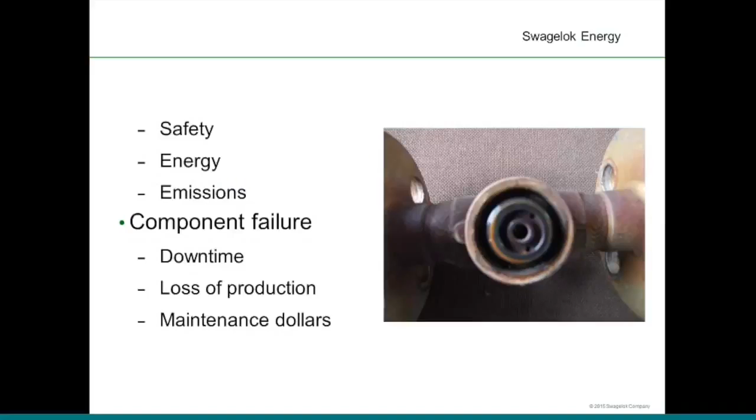The reliability areas I'm going to be talking about are, number one, steam leakage, and two, component failure. Steam leakage affects safety, energy, and emissions. When we talk about leakage, people always think it's just about energy, but it's more of a safety item. The other thing I want to talk about today is component failure, downtime, loss of production, and maintenance dollars.

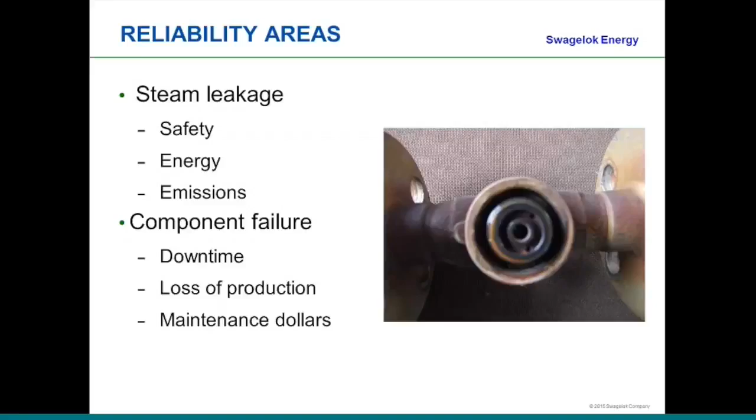Everything that we put into a steam system today must last 6 years. But in order to achieve that 6-year reliability, a number of things must occur. And the biggest thing of any reliability program, the most important thing, is change. Things must change. The way we did it 10 years, 15 years, even 5 years ago is not how we can do it today. We must demand reliability of all components that we put into the steam system. In order to do that, a number of things have to change. So if you're ready to have change, then things will dramatically improve in the steam system.

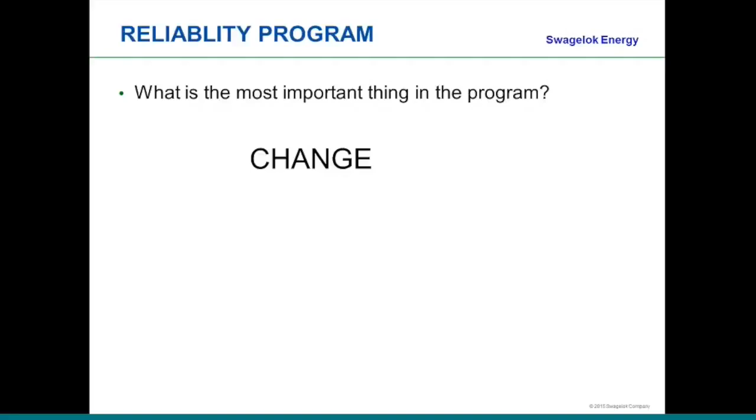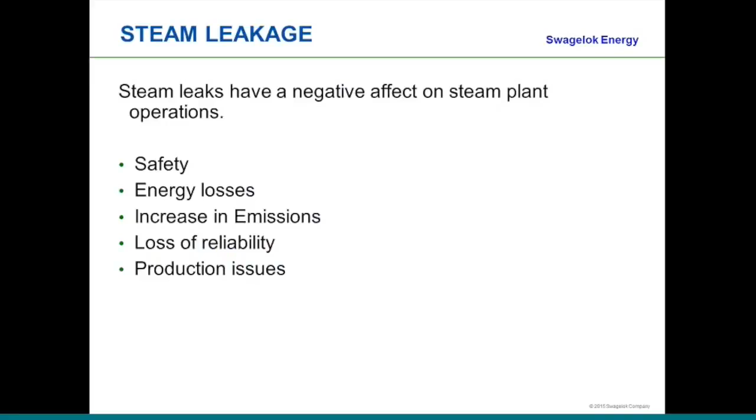One area is steam leakage. Steam leakage has a negative effect on a steam plant operation: safety, energy losses, increased emissions. One of the things people forget about is the emissions. So if I go out and fix a steam leak, how many tons of CO2 will I stop being put up into the air? The other thing is also loss of reliability, and the thing a steam leak does is cause production issues. So those are some of the areas we want to take a look at.

Energy losses can be as high as 19% or even higher in a few cases of the total steam energy production cost. In doing analysis for steam leakage in plants, unfortunately we've seen over and over again as much as 19% of the energy produced is lost through steam leakage. So if I had a $1 million fuel budget, 19% would contribute to $190,000 in energy losses. A tremendous amount of energy to be lost.

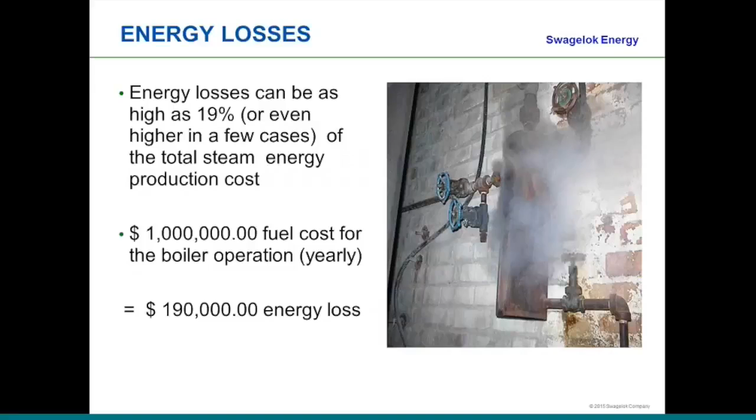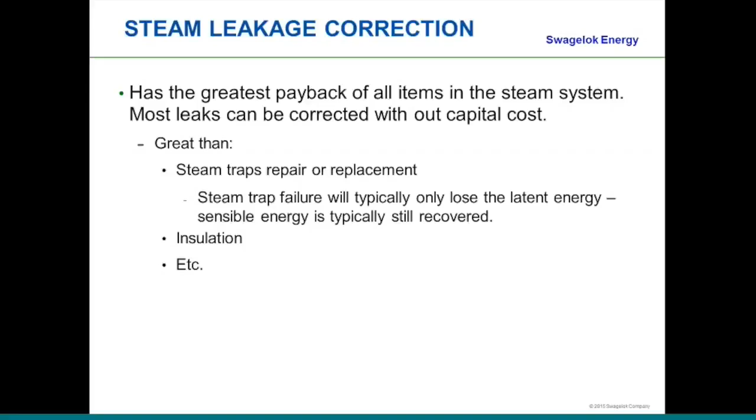The greatest payback of all items in the steam system is steam leakage correction. We talk about doing this or that in the steam system to improve or optimize the steam system thermal cycle efficiency. One of the biggest and greatest paybacks is steam leakage, greater than steam trap repair or replacement. People always say, put money out there to correct the steam trap failures and it'll save you all this money. But steam leakage is far, far higher payback than steam traps, insulation, or et cetera. So if you're looking to optimize the steam system, steam leakage is the number one, or maybe even number two, area that you want to take a look at.

Steam leakage versus compressed air leakage: a steam leak on a yearly basis would cost $3,591 at 100 psig for a 1/8 inch leak, that's based on $10 per 1,000 pounds. Steam leakage represents an immediate savings.

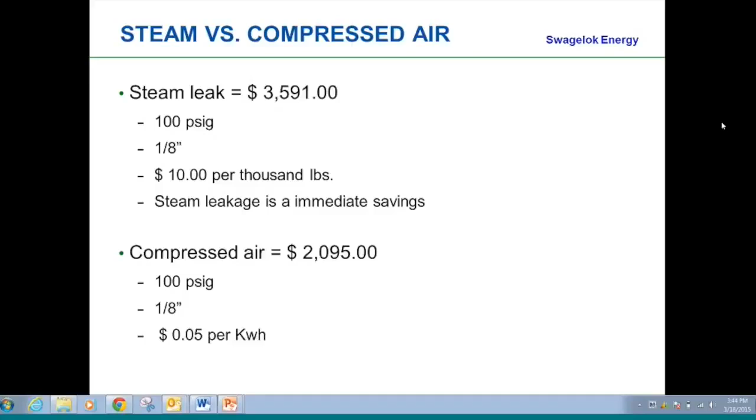Compressed air leak would cost $2,095 at 100 psi for a 1/8 inch leak, based on $0.05 per kWh. Now the thing about that is a steam leak, if corrected immediately, is an immediate savings, whereas with compressed air, if you go out and fix the leak, the real savings comes from finding enough leakage to remove an air compressor from operation, and then you get the bulk of the savings. Just going out and finding an air leak and correcting it without shutting an air compressor down and achieving the electrical savings, there's not much savings. So steam leakage is immediate savings.

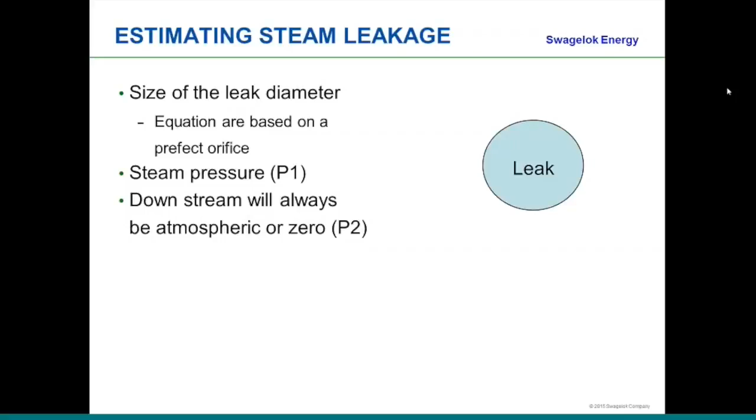Estimating steam leakage is difficult. You need to know the size of the leak diameter, and with steam it's very difficult to tell the leak diameter. The other thing is all equations are based on a perfect orifice, with P1 being the operating pressure and P2 being atmosphere, the downstream pressure. But because it's not a perfect orifice, and leakage is a crack on a piece of steam piping, or a flange leak, or a thread leak, it's not a perfect diameter. Therefore, we use different types of equations to come up with the estimated steam leakage or cost.

Here's an example of a steam leak, 6 inches, we always call it the plume. I get asked all the time, can you estimate the leakage by plume length? The answer is no. It depends on pressure, it depends on the diameter of the leak, it depends on a lot of things. But we had measured this through flow measurement, and the distance was about 6 inches. The valve size was 3/4 inch, valve opening 1/3 open, so we estimated about a 1/4 inch leak. The pressure was 140 psi.

The pressure was 140 psi. What the cost was: $14,367 a year. That is for one leak point.

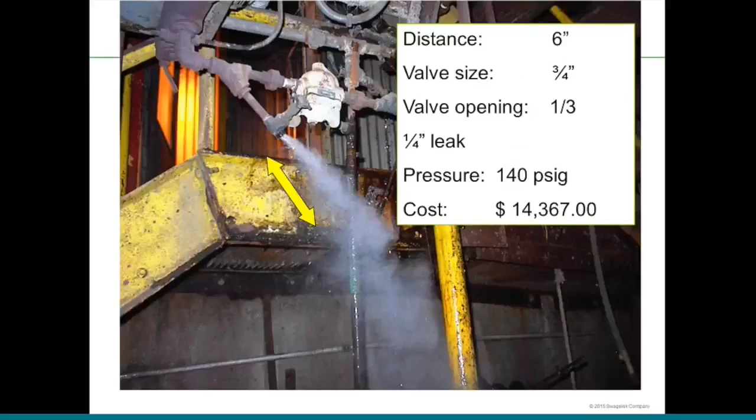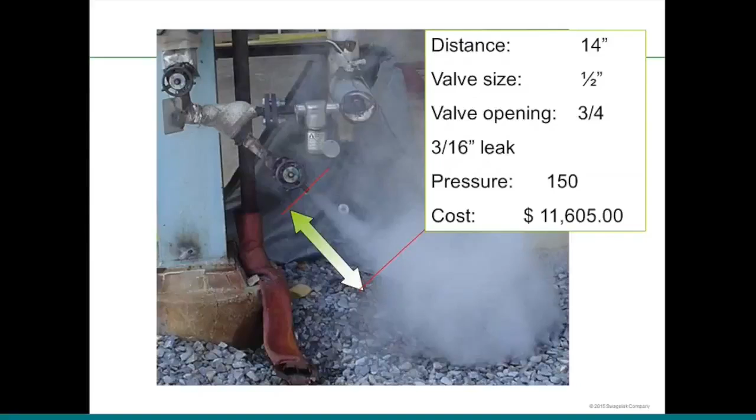Another one there, as we find a lot in steam leakage, is valve failure. The distance was measured out to be 14 inches. Valve size 1/2 inch. Valve opening was 3/4 inch, or 3/4 way open. A 3/16 leak was estimated at pressure 150 psi. Cost was about $11,605. So just on 2 applications, the savings is about $20,000, which again is immediate savings.

Another leak, 40 inches in length. Leak was 3/16 inch, 250 psi, costing $18,651. The thing about steam leakage is the leak is this diameter today, but it will increase day after day because steam will wire draw the pipe leak point and increase in diameter.

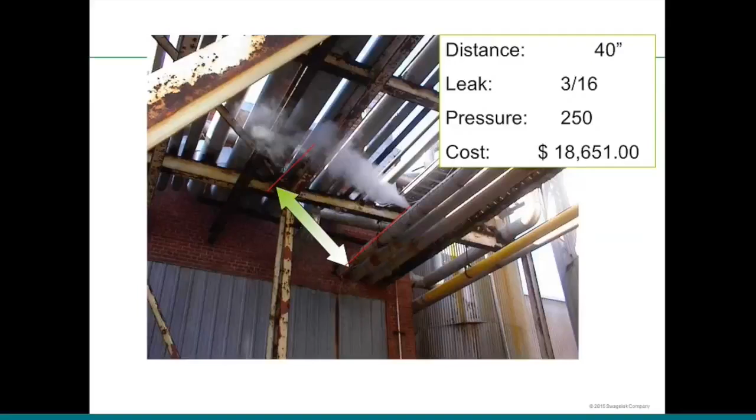So the thing about steam leakage is you have to be extremely proactive. We cannot tolerate steam leakage in a plant operation.

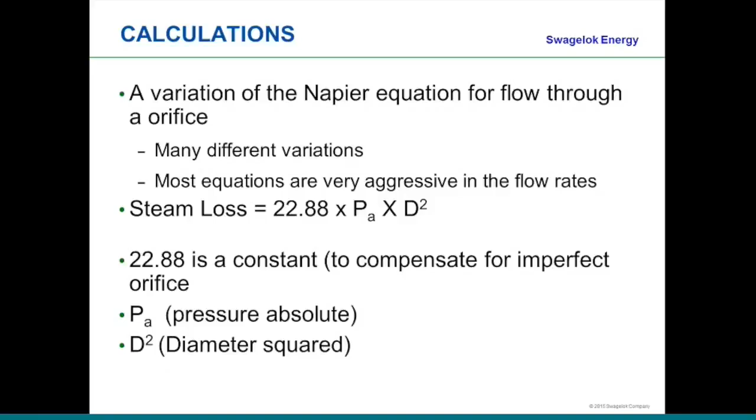The calculation uses a variation of Napier's equation for flow through an orifice, there are many different variations. Most equations are very aggressive for flow rates. For steam loss, we typically use 22.88 times pressure absolute times diameter squared. The 22.88 is a constant that compensates for the imperfect orifice. No matter how you do it, it's estimated, because the orifice is not a perfect orifice, so you cannot use P1 and P2 in the equation. Anyway, this turns out to be a pretty conservative estimator for steam leakage.

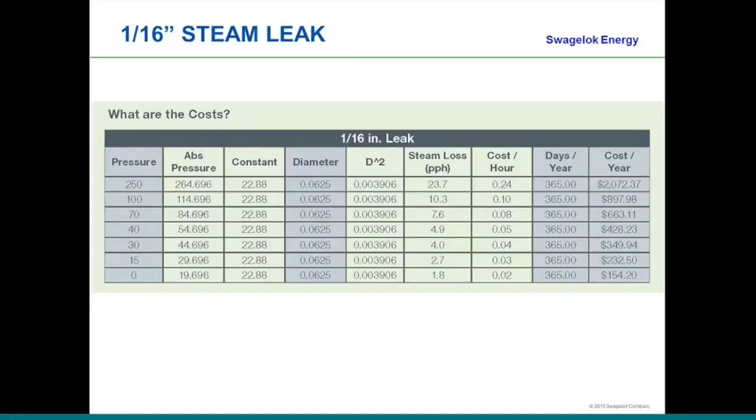If we take a look at this chart, there's a 1/16 inch leak at 100 psi. The steam loss, energy loss per year, is going to be $897. At 250 psi, it's $2,000. If I go up to a 1/8 inch leak at 100 psi, it's $3,591 per year. Also part of these calculations is the emissions, how much emissions will be saved or stopped if I go out and fix the steam leaks.

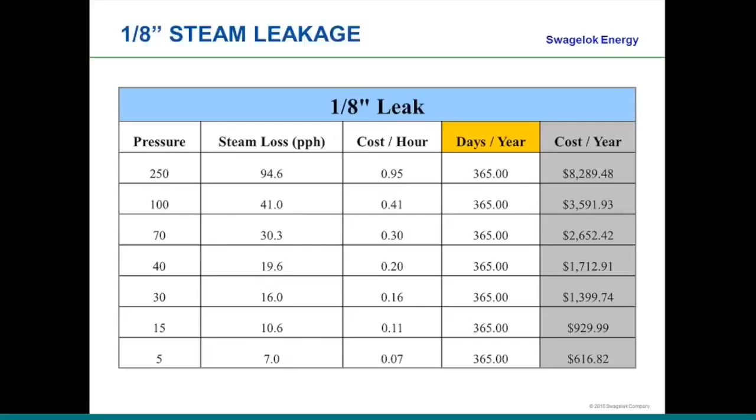So if I was burning coal, the factor for CO2 per million BTUs is 205 pounds. If I was burning natural gas, it would be 117 pounds of CO2. So by going out and fixing leakage, we reduce the emissions that we're putting up into the atmosphere. A lot of projects in recent years have been totally for optimization on emission or emission reduction.

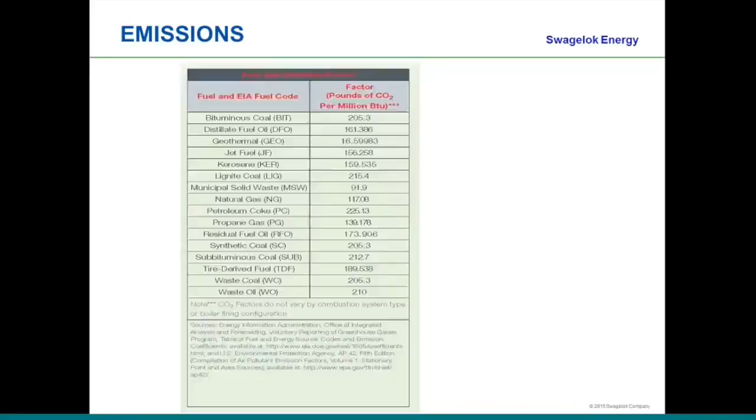Because the plants sit in a non-attainment area and need to reduce emissions, so safety, emissions, and energy all play into correcting steam leakage. One of the things you always have to ask yourself is, what causes steam leakage? Number one, corrosion, CO2 or oxygen corrosion. In the steam system, we always blame CO2, carbonic acid, for causing all the leaks, but don't forget about oxygen corrosion.

On root cause analysis and any correction, part of your change is a very aggressive root cause analysis program to understand what caused the failure. Doing root cause analysis, you will find that CO2 corrosion is sometimes there, but oxygen corrosion probably is going to be a more dominant player in causing steam leakage. So you must look at oxygen corrosion.

Installations. The thing with this is that you want to stop steam leaks by stopping threaded pipe. One of the weakest parts of the piping system in steam or condensate is the threads, and the first place corrosion is going to attack is the threaded connections. So today, installations in steam or condensate don't thread pipe. Everything is welded, flanged, or tube connectors.

Component selection. What are the components we're using? Still today, a lot of people are using the same standard packed valves for steam. The last great revolution we had on packed valves was 1941. So the other weak point in valving, besides the threaded connections, is the packing. You want to look at your component selection, going away from standard packed valves to other types of valves available today in the steam system.

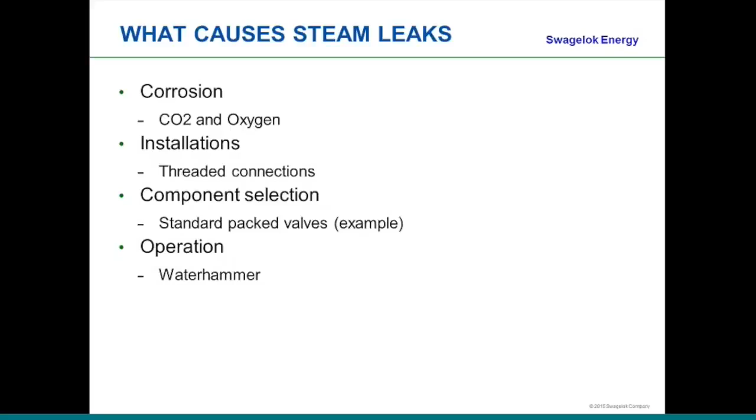Steam component failure occurs in threaded connections, valve flanges, heat transfer components, condensate lines, etc. Those are the areas we find the failures: threaded connections, valves, flanges. The thing people tell me is flanges leak. Flanges do not leak; you have to know the torque pattern, the torque specification when you're torquing them down. Condensate lines should be stainless steel, but we're still using carbon steel. If you use carbon steel, you should use at least Schedule 80 for the piping.

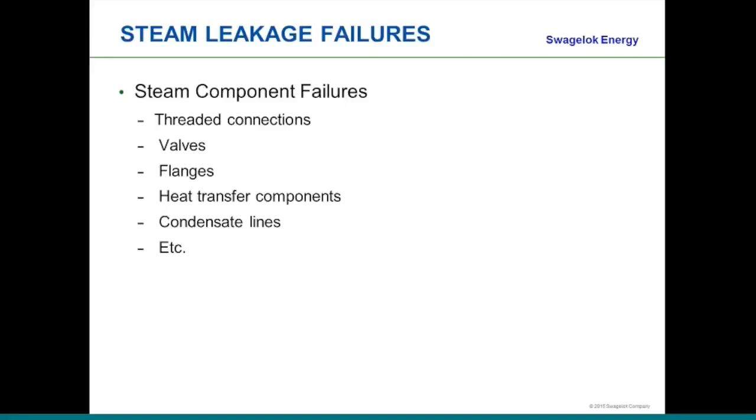Steam leakage will create safety issues. People do get burned from steam, condensate dripping down extremely hot, burning people. These are injuries that occur over and over in the field.

Foggy conditions affect visibility as steam condenses to condensate, creating water in the air. In cooler climates, condensate will freeze and cause hazard conditions, ice buildup. So there's a multitude of safety issues that we have to resolve and not allow to exist for plant personnel. So steam leakage we must correct.

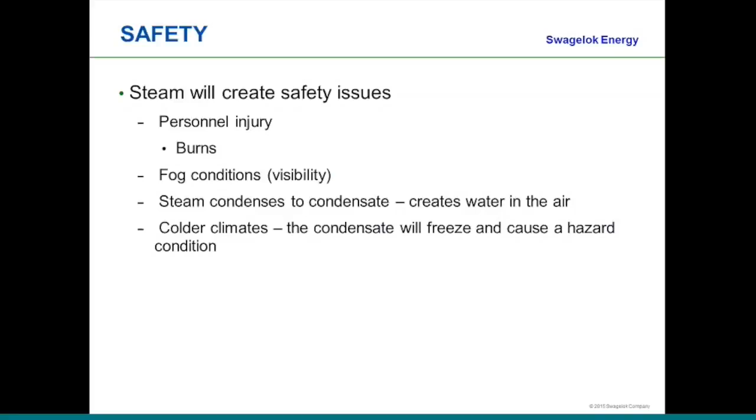A roadmap for leakage: no more than 6 leak points per year. Eliminate thread connections. Eliminate standard packed valves. Change component selections, selecting components that are not prone to leaks, unlike packed valves. Use larger valves, different types like butterfly and ball valves. The fourth thing is installation standards, having a standard for how components go in, so they always go in the correct way. So there's your roadmap for correcting steam leakage.

But I'm quite serious that no plant should have more than 6 leak points per year for steam leakage. We have the technology and the way to stop steam leakage.

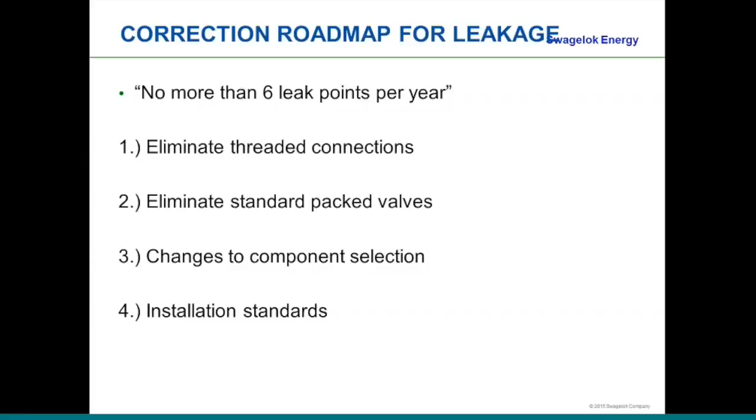The other reliability issue is component failure costs, downtime, maintenance dollars, production losses, etc. If I lose a shell and tube on the process, I take it down and plug tubes. That's costing me downtime, maintenance dollars, and I'm losing production.

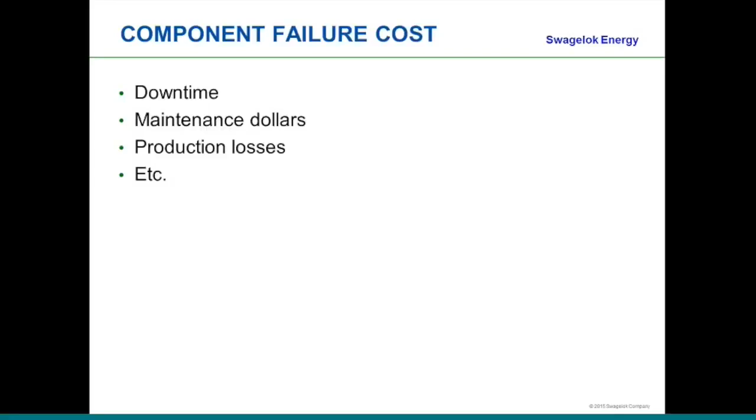For example, this picture shows a failure on the tank rail car system. Number one, it's a safety issue, steam blowing out. Two, we had to isolate the whole area, shut down the offloading of the rail cars, and correct the issue.

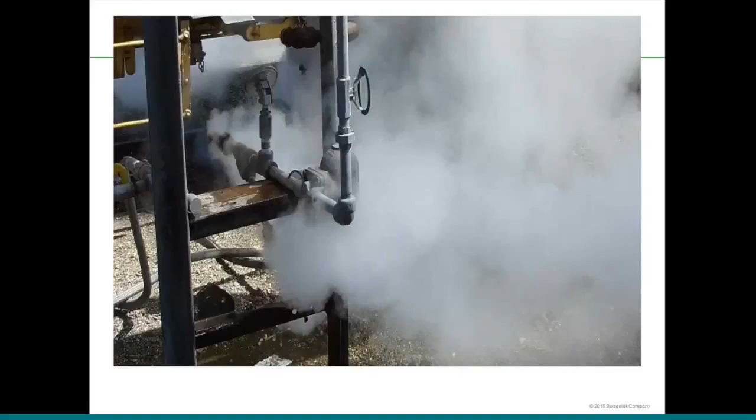Another example here is typical steam hose failures. One thing I want to make a statement on: steam hoses need to be rated to B31.1, the National Power Piping Code. Most hose failures we find with steam leakages are hoses not rated to B31.1. Make sure every component you put in the steam system is rated to B31.1, the National Power Piping Code.

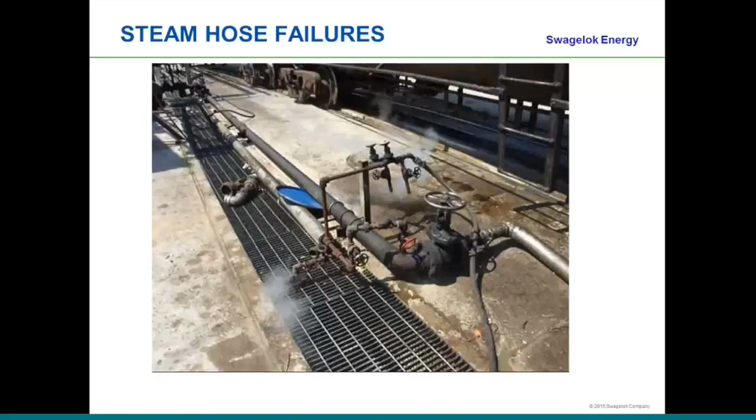An example of component failure is a tracing system where a valve gives way and steam blows out, causing a pressure drop. When you drop in pressure on steam, you also drop in temperature, and when temperature drops on a tracer, you cause product transfer issues. Again, the result is downtime, which is the thing we can least afford. Component failure plays a critical part in production and eliminating downtime.

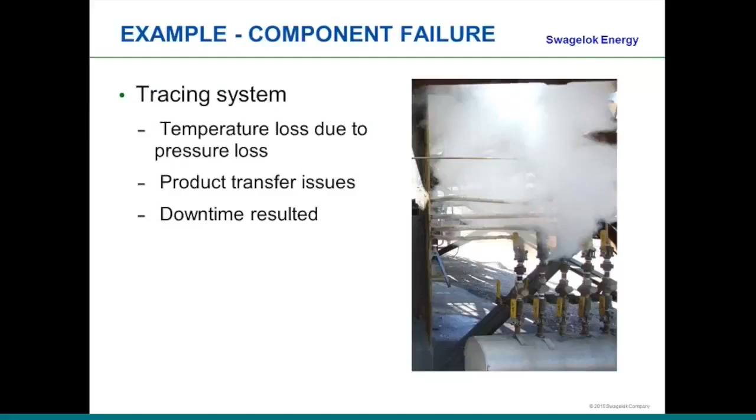Valves, standard packed valves, threaded connections, internal leakage. The thing with component failures on a steam valve is we buy valves that already leak. You must buy valves that don't leak, with leakage rate per FCI, ANSI, or API standard. When buying valves, make sure you buy class 4 or higher, that do not have a high internal leak rate. If you purchase a valve without specifying an internal leak rate, you get a valve like this one in the picture, with steam coming out of it.

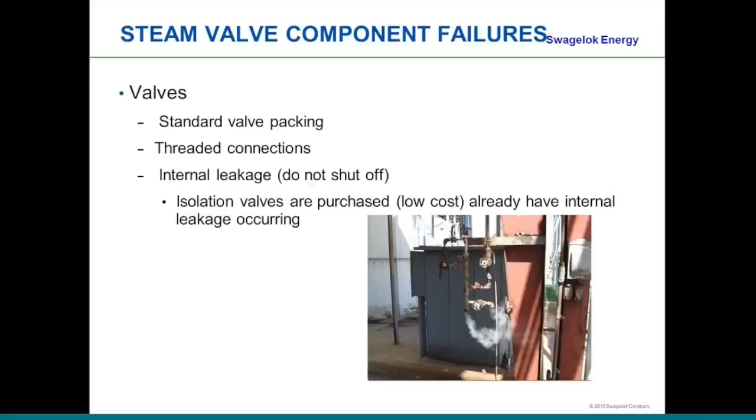Component failure also affects heat transfer tubes. We have tube failure and we're always plugging tubes. PRV valve failures - pressure reducing valves should have a minimum of 6 years operation without any problem. But you have to remember a pressure reducing valve, many of them will go into critical operation. We must stop them from going into critical operation, and we must install correctly and select the components properly.

Control valves, again, require installing correctly and making the correct selection. Do I use a cage trim valve or globe? What does the internal look like? How do I operate it, electric or pneumatic? For heat transfer components, what type of service? Plate frames are used in certain types of service, and in certain types they should not be used. Like a steam coil - should I use copper tube or steel tube? For steam, you should use steel tube.

Expansion devices - having the device in the correct location, taking axial movement only, will prolong the life. Turbine components - internal nozzles, buckets, blades, erosion, steam quality issues - cause component failures. Condensate pumps - without having NPSH, the pumps will cavitate, and then we switch to a steam motive pump, which gives us less reliable operation. Steam traps - a steam trap today under 250 psi should last you 15 years. You should not have component failures.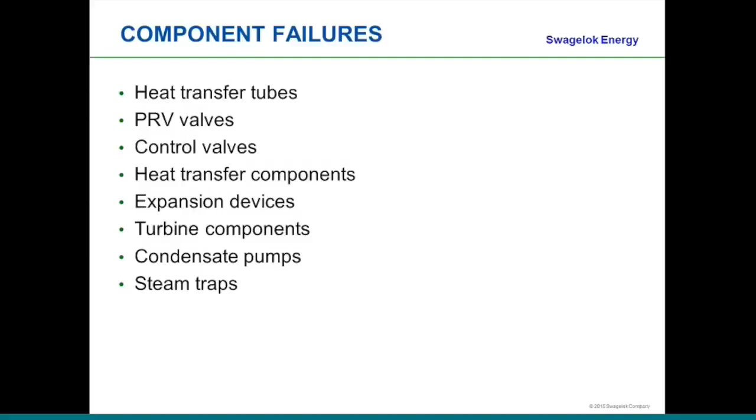The thing to increase reliability: number one, change must occur. Change can be engineering specification, system design, product selection, installation standards, or operations per SOP, standard operating procedures. So the change is not going to be just in one area - it's going to come from all different areas, even in maintenance of the product. So to increase reliability in the steam system, number one, change must occur.

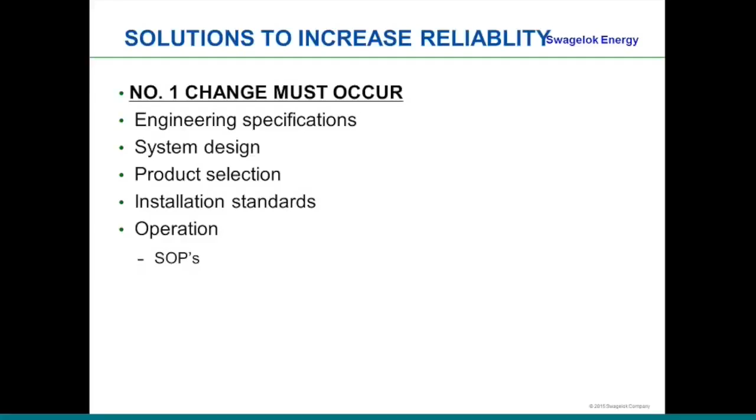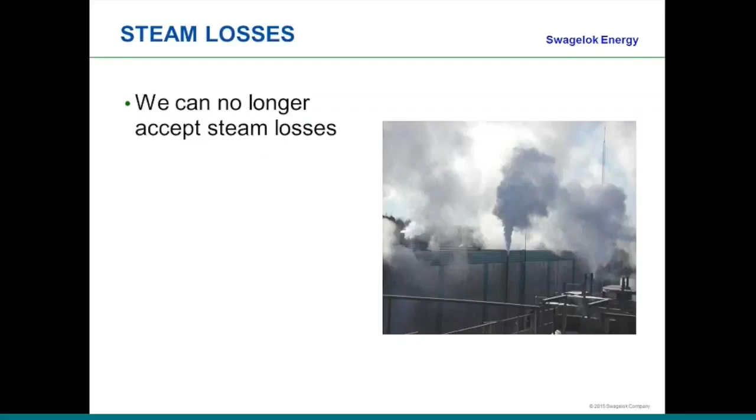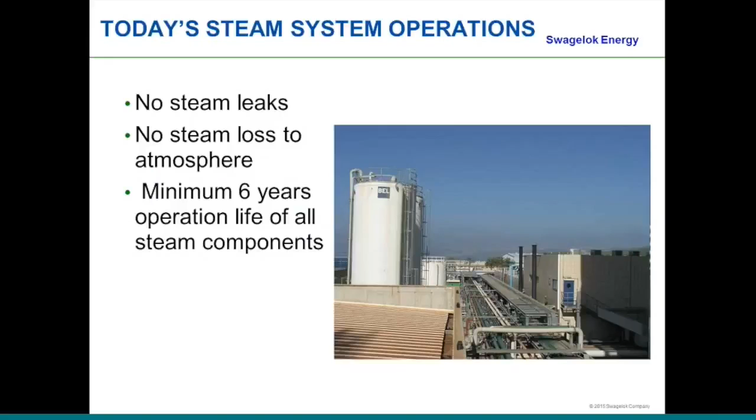Another thing I want to point out is steam losses, venting steam to atmosphere. We don't do that anymore - it costs too much money. The thing about optimization of the steam system is reducing and optimizing it by stopping venting steam to atmosphere; it's a major loss. So today what we want to see is no steam vents to atmosphere, no steam loss, no steam leaks, and a minimum of 6 years operation life for all steam components, which is extremely achievable, no problem.